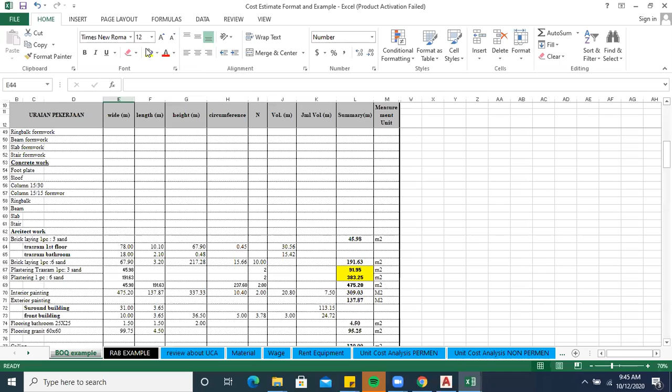Okay, today we are going to talk about how to calculate concrete work. Before that, I will analyze the actual work of the concrete. Based on our job description, I already have several items. First is footplate, the foundation for the house.

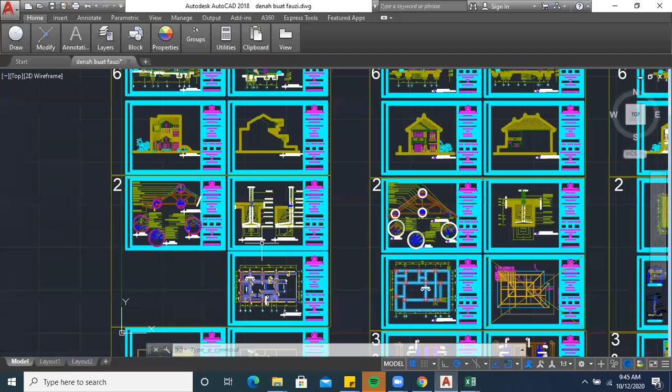First, what we have to take a look at from the footplate is the size of the footplate. Take a look on the detail drawing. For example, this drawing - the drawing of footplate is like this.

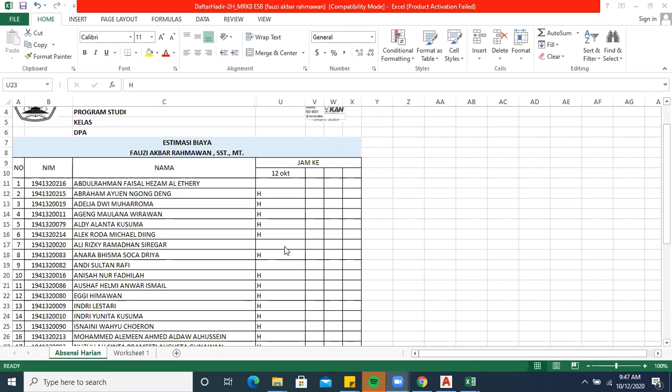Okay, our first calculation is about footplate. Now let's take a look at which part of the footplate.

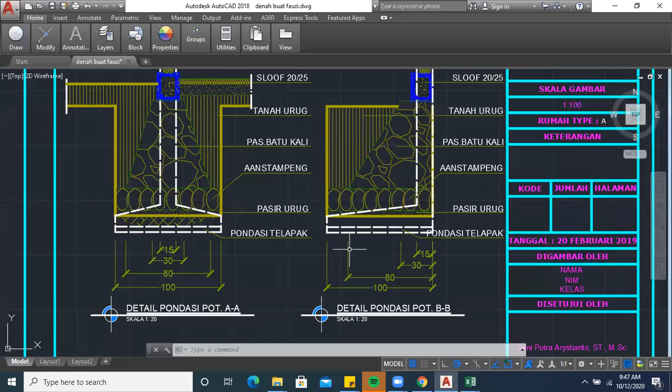Before we calculate the footplate, we have to take a look at the drawing of foundation detail. Based on this drawing, we get the information that this is the drawing of footplate, guys - this is the element of footplate. And how do we calculate the volume of this item?

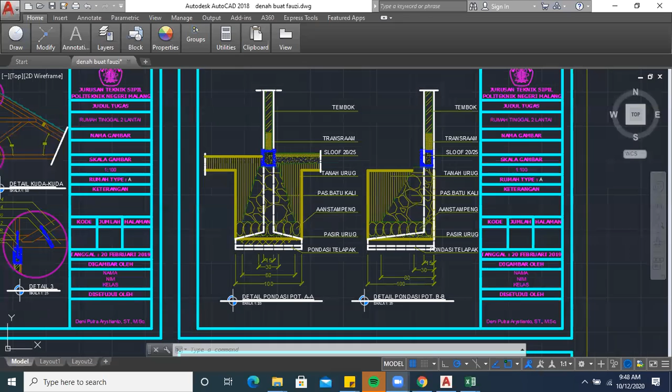Okay, let's make it easy. Let's assume that the size of this foundation is 1 meter - based on this drawing, the width is 1 meter. But unfortunately, we don't have any other detail drawing from the footplate foundation, so let's assume that the size of the footplate foundation is 1 meter times 1 meter.

And then what we have to do next is find out the thickness of the footplate. How do we find that kind of information? We can get this information from the detail of foundation, but unfortunately my detailed drawing is not quite detailed enough to understand the thickness of the footplate. So I will find it from another drawing.

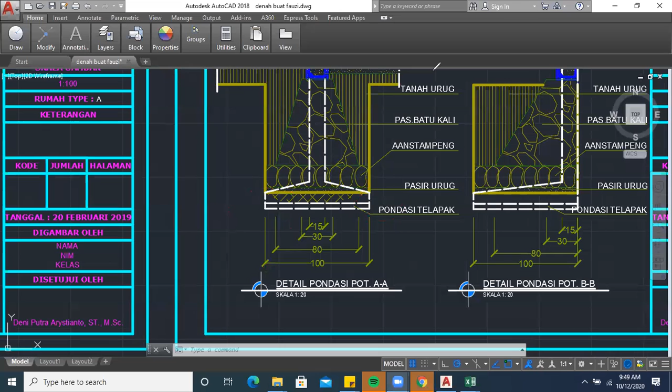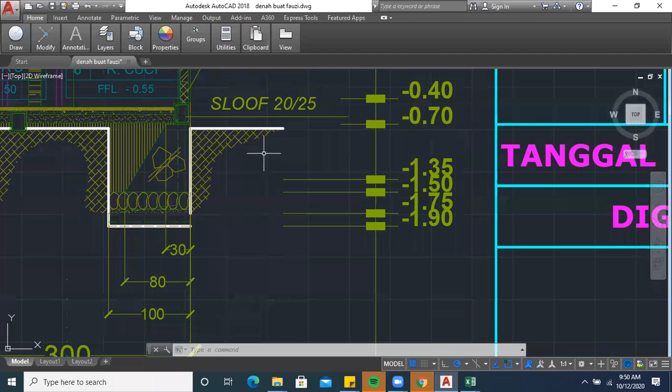For example, in the drawing of the section, dari potongan. Okay, up here - if you take a look at this drawing, I hope you can read it.

0.00 means that this is the elevation of the floor, ini adalah elevasi lantai, elevasi 00. Usually it's like that. And from that point, we try to analyze the depth of the foundation, especially the footplate foundation. Minus 1.9 means that the elevation of the bottom level of the footplate foundation is 1.9.

And from this drawing we also find minus 1.75. This shows the top level of the footplate foundation. So how much is the difference between the two numbers? The difference between the two numbers is 15 centimeters. So we can assume that the thickness of our footplate is 15 centimeters.

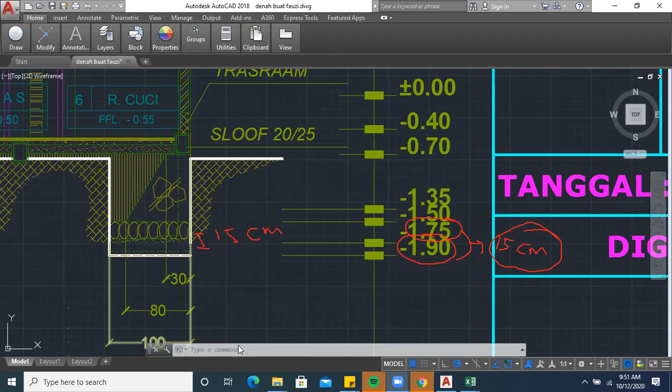Is that clear? Yes sir. Okay, no questions? No questions, okay. So let's assume that 15 centimeters is the thickness of the foundation. So for the footplate, we have the width is 1 meter, the length is 1 meter, the height is 0.15.

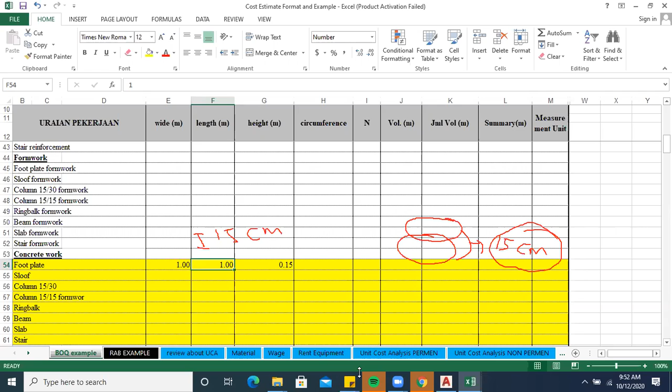Okay, and then what do we have to do next? We have to calculate how many footplates there are in the drawing. The question will be, what kind of drawing do we have to look at to get that information - gambar apa yang harus kita cari supaya tahu jumlah dari fondasi telapaknya?

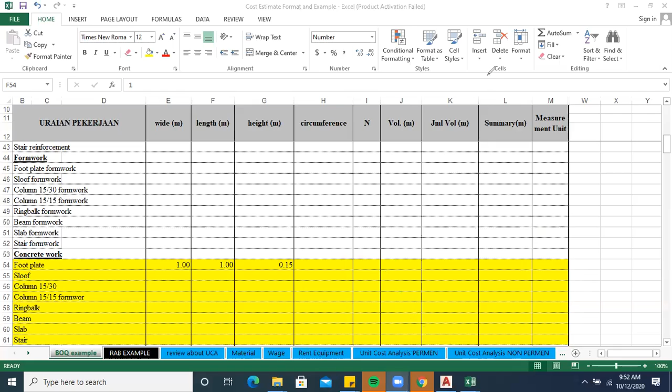Anyone know? Coba Yuda, gambar apa yang kita cari kalau kita mau mencari jumlah footplate? Foundation plan. Nice, foundation plan - rencana pondasi. First thing, we go to the foundation plan.

Over here - okay, this is the drawing of the foundation plan. It's not very clear, can you see this?

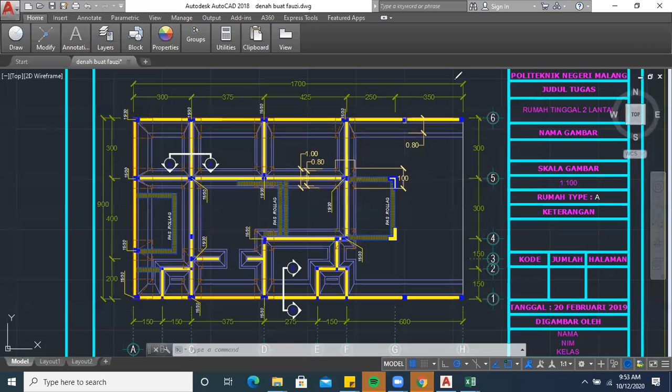Okay, let's calculate how many footplate foundations there are. We can start from the top: 1, 2, 3, 4, 5, 6, 7, 8, 9, 10, 11, 12, 13, 14, 15. Okay, so we get the number of footplate foundations is 15.

We go to this Excel and type 15 in our number. And in order to calculate the quantity of concrete, remember the measurement unit is cubic meter, so what you have to do is just multiply all the numbers. Okay, this is how we calculate the footplate.

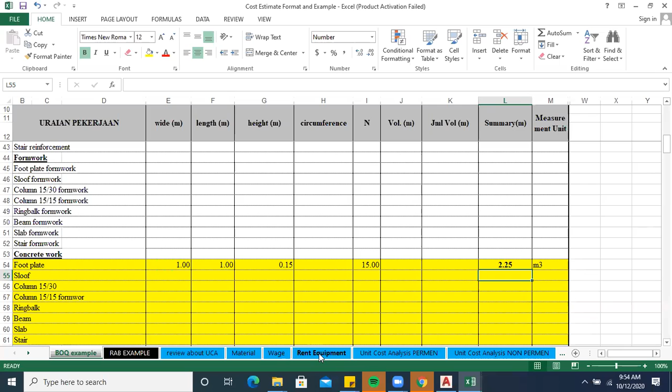Is that clear? Any question about footplate? No sir. Okay, I'll stop sharing.